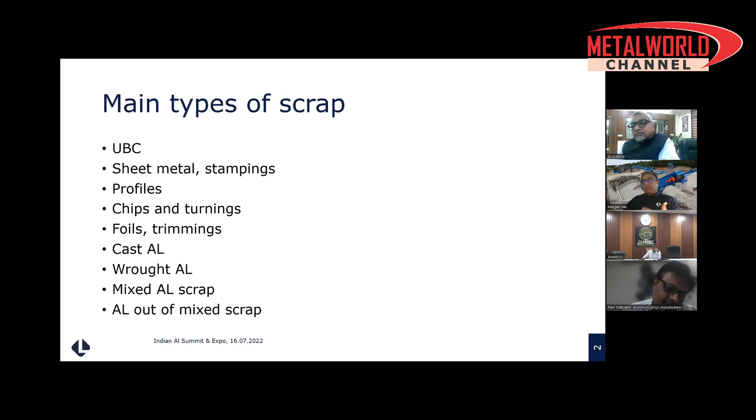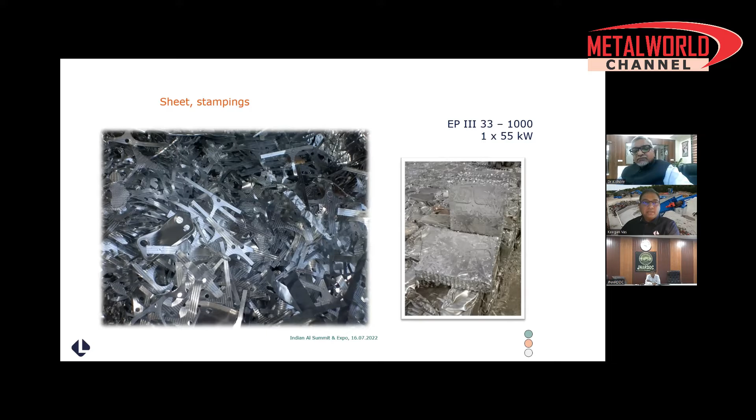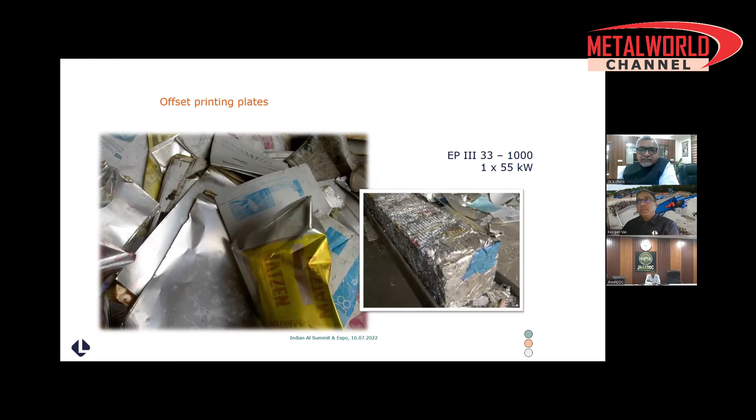In the coming slides, I will run through some pictures so you understand a bit more. These are coming from the process industry, where you have sheet stampings. On the right is the product after process, a bale that is formed. Sheets from offset printing plates have some contamination with paint and other material. There are two ways to process this material: you could either bale it as it is, or you can shred it if you intend to clean up the paint and other contaminants. Chips coming from various machining processes are briquetted into cubes, as you can see.

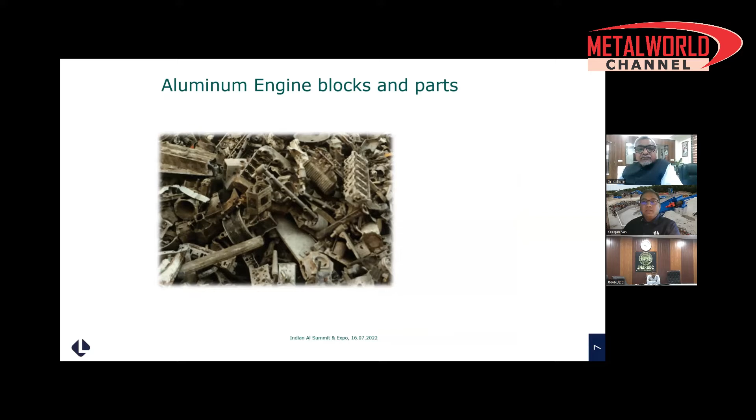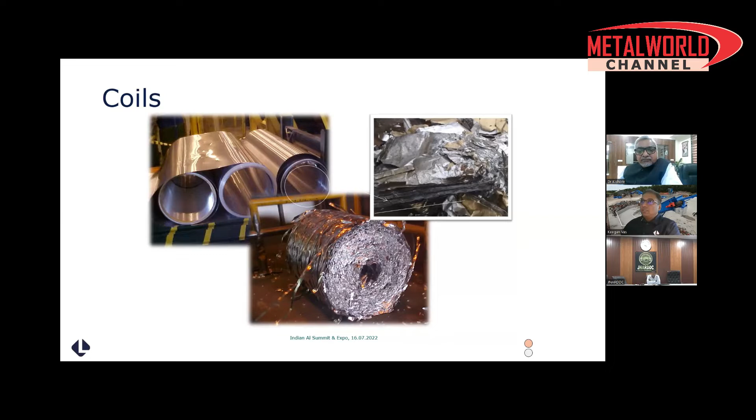Mixed loose scrap aluminium profiles coming from window panes and other applications in buildings and newer structures. Engine blocks and parts. I think this picture is from a car company, so you can see some engine blocks, gearbox. More and more cars are using aluminium in their manufacturing components. Scrap, again, another picture of different kinds of scrap. Coils from the process industries. This is virgin material and nice to be recycled.

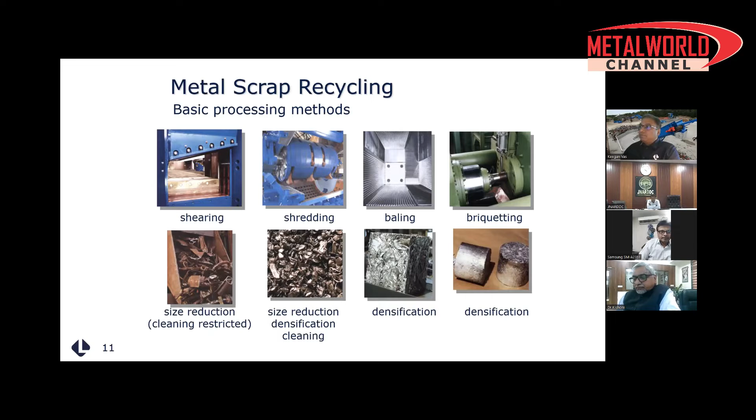So here is where Lindemann comes in on the technology and the available methods. You can see pictures of processed scrap. Shearing is the simplest process where you just cut material; it's as good as using a scissor on scrap. You can cut it to whatever size. Then comes shredding, which gives you size reduction, densification, and helps clean the scrap from contaminants. Baling is a simple process where you compact scrap. Aluminium is very light, so it gets very expensive to transport material from your yard to the smelter, and baling is the cheapest way to process such material. The last one is briquetting, mainly for fines.

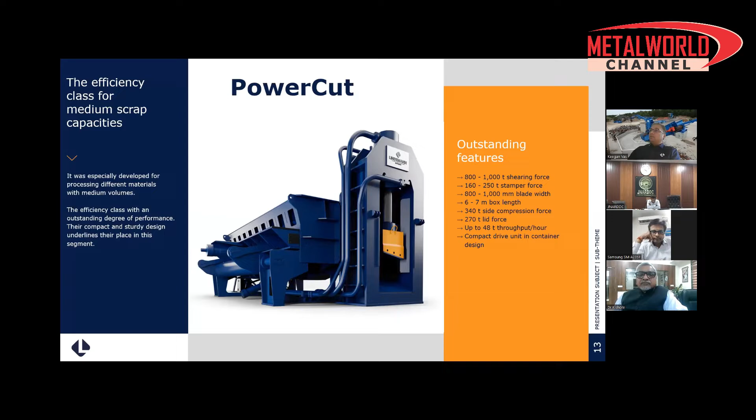Shredding is an interesting topic discussed all across the country recently, with increased awareness and motivation from the government. A lot of people are considering investing in shredding, so let me touch a bit more on this aspect of recycling. You have a rotor with hammers on shafts, say 6 shafts with maybe 10, 12, or 16 hammers rotating on that rotor, which weighs roughly 25 to 28 tons and rotates at 750 RPM. A ferrous shredder runs at a slightly lower RPM of 600. It strikes material against an anvil to crush it into small pieces, which drop through the grids on top and below. So basically you get size reduction.

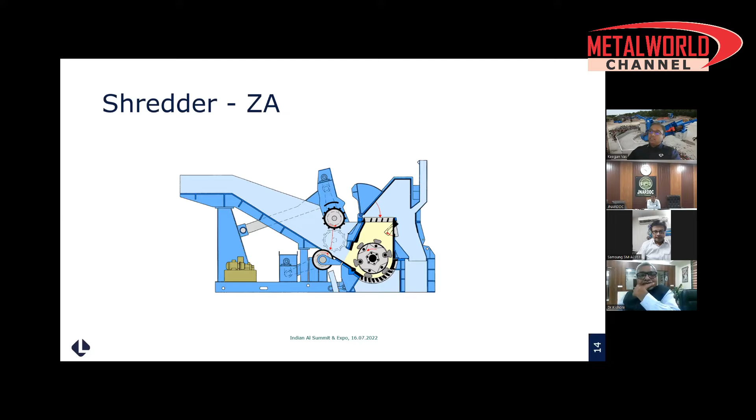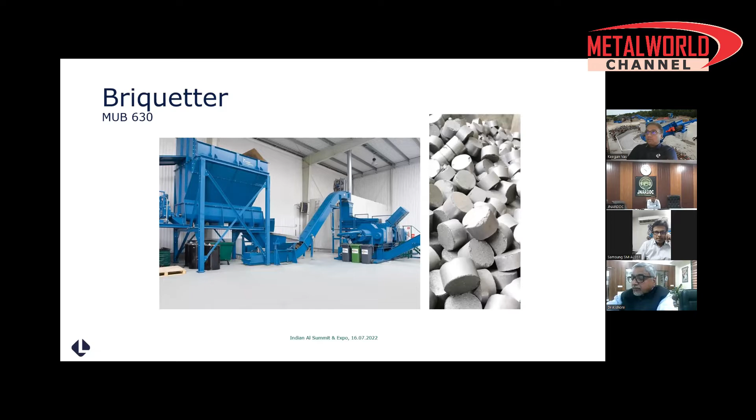Coming slide, we'll see more pictures. Yeah, so you can see the dosing bunker on your left, then the press itself on the right. Baling and briquetting both are quite close to each other, but what briquetting does is it ensures that the moisture content in the material is reduced to around 1% or sometimes even lesser. This is important because when the briquettes are going into the smelter, they need to be as dry as possible.

On the other hand, it is used to process chips, let's say chips coming out of CNC machines or lathes and so on. So they have contaminants of lubricant and oil and moisture in it. So briquetting is the best way. Other than that, dry material is also processed directly into a smelter where they have this vortex which is created, and you have liquid pumps which charge material into the oven directly.

However, by briquetting, the metal yield is also, we have seen that it's around 18% higher than what you would get by simply processing chips into a smelter. And again, burning oil is also not good. So most clients nowadays are preferring to briquette these chips instead of just smelting it right away.

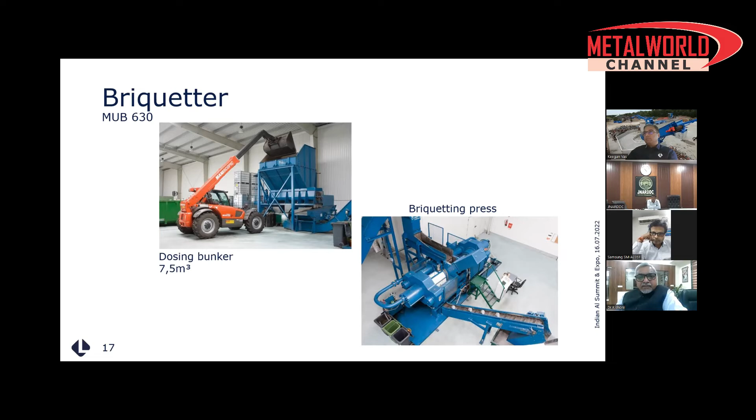On the other hand, the size of briquettes is much smaller. So when you have a lot of induction furnaces that use these materials, which we are seeing mainly in the secondary process, where you have small induction furnaces, they are not able to process bigger bales. Bales are of dimension of 300 mm by 300 mm. That makes it difficult. So with such kind of briquettes, the smallest size is about 70 mm, 90 mm, going up to 200 mm, dependent on the requirement. That's how the finished product looks like.

So let's look at the economics of these different processes that we spoke about. The figures are from data that we have collected across several of our machines. However, in recent times, with the price of oil going up and everything else getting more expensive, those may have changed a little bit. But overall, it's quite close. So shearing a ton of material would normally cost around 17 to 21 euros. Baling is 9 to 13 euros, briquetting 18 to 25 euros, and shredding is the most expensive process.

However, the higher the tonnage, you have better economies of scale, because the capex is quite intensive on a shredding plant, and it's also a very extensive process, maintenance intensive. So with shearing, you just have better handling. The size is 100 to 600 mm as you want. Bales: handling as well as better metal yield. With briquetting, you have handling, better metal yield as well as liquid removal. So essentially, you have dry, moisture-free briquettes.

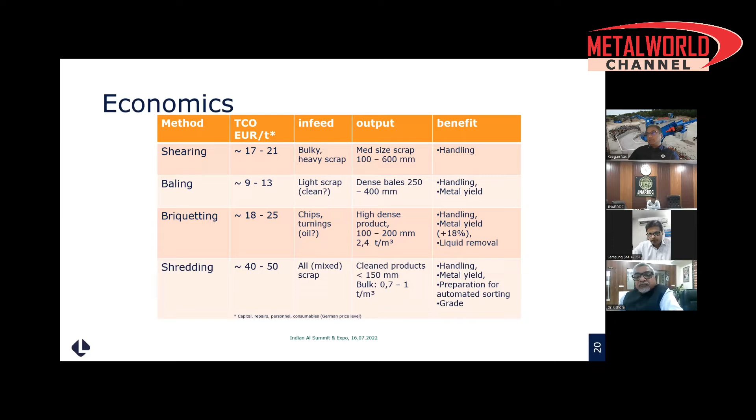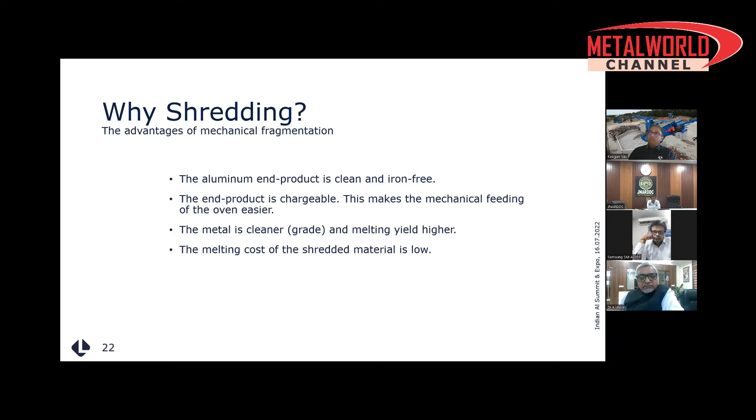So why shredding? The aluminium end product is ensured to be clean and iron-free. In a smelter, this is an important factor where you want the material to be as clean as possible without any contamination, be it iron, maybe copper, maybe anything else. The end product should be chargeable to make mechanical feeding into the oven easier. You get a better, cleaner grade of aluminium, and the melting cost of shredded material is much lower as compared to baled material.

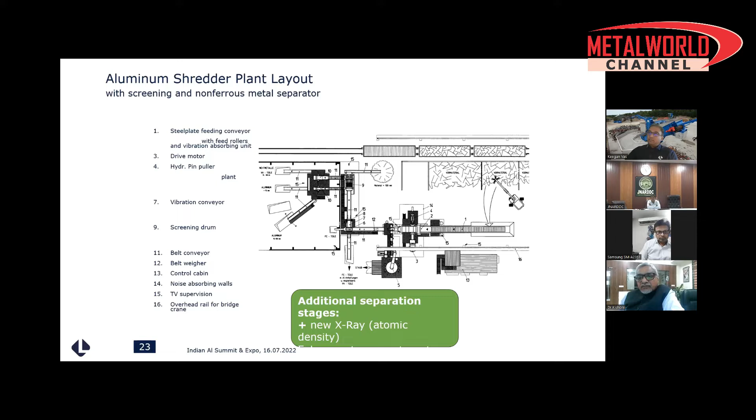That's a typical layout of an aluminium shredder plant. So you have the in-feed conveyor, the drive motor, the vibrating conveyors, screening drum, belt conveyor. You can also have magnetic separation by a drum magnet or overband magnet. On the side, you can see there are some noise absorbing walls and an overhead crane for maintenance. Another view of the shredder plant.

So what this includes is treating of the shredder heavy fraction and the light fraction. So when you have a mix of material that is coming, that needs to be processed. For example, when a car is recycled, you have ferrous, you have aluminium, you have seats, glass, rubber, tires, copper from the motors and everything else. Or if you are recycling, say, a washing machine or white goods, refrigerator, and so on, you have copper along with aluminium and everything else.

So the shredder downstream then has different technologies to recover aluminium, and most of you might be familiar with Zorba, which is a name for a metal mixture of aluminium, copper, zinc, and brass. A 3D view of a basic shredder. And this is also an installation, I think a recent one we have done in Europe.

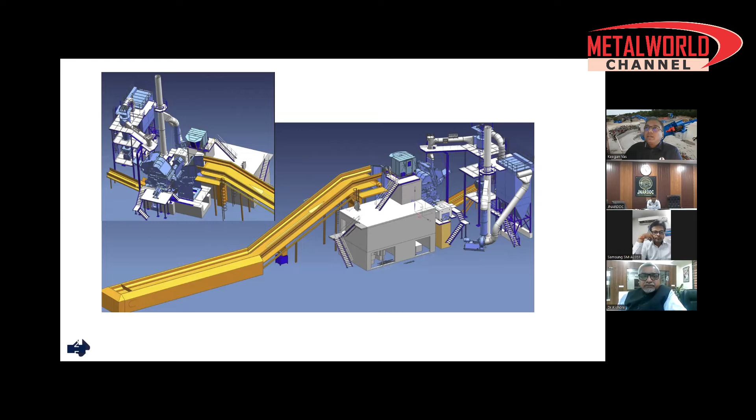As you can see, there's an in-feed conveyor, the shredder, and then the dedusting system. So we suck out air from the shredder box, which pulls away dust and any kind of light material such as plastics, rubber, and things like that. And this is then processed downstream.

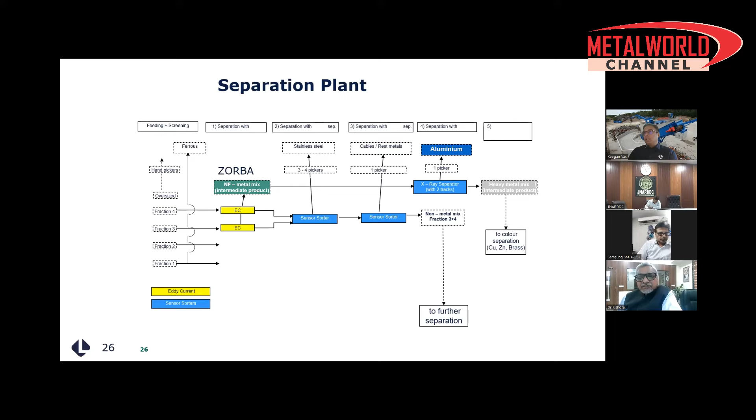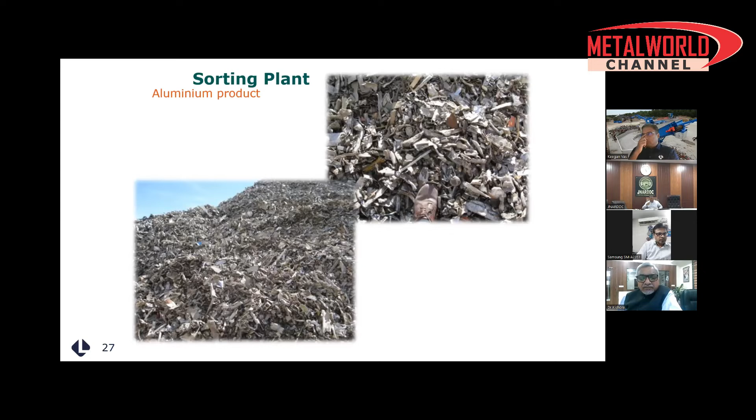The sorted product, as you can see there on the left, is the aluminium product. And the heavy metal product. Everything else that was not aluminium is sorted in a separate section.

We also use X-ray technology. So this is mainly used for sizing. For example, in the first step, you size the material coming out of a shredder into two fractions, one between 10 and 30 mm, and the second one between 30 and 100 mm. You have an X-ray tube that activates the valves that are under the belt. So there is a jet of air which is blown across material to sort it into the two bins, as you can see.

Once the material is sorted or you have done the sizing, then in the next step you have X-ray imaging process. So this works on atomic density parameters. So the details are fed into the system, and that compares the atomic density to the actual material that's on the conveyor belt, sorting it into each channel.

On here, I try and mouse. Can you see me moving there?

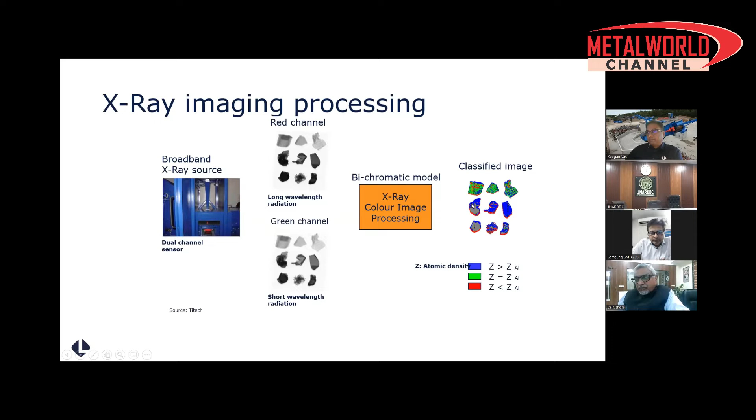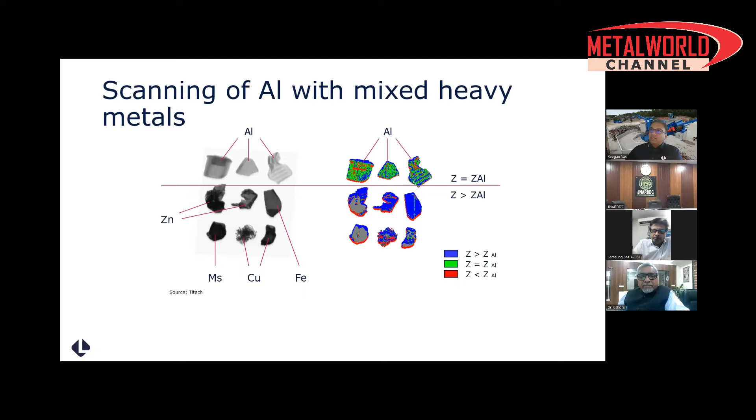Okay. So around here, the red mark is a small nail. So when you have these profiles coming from buildings and so on, they have some screws in it. So this can actually be a big problem for the smelter. And thus, X-ray imaging helps to ensure clean material coming into the smelter. So this is a better picture here. You can see the nail. As well as you can use it to scan and separate other materials such as copper, zinc, and brass. Fractions that you can see.

So the environmental considerations, why go into all this headache? Aluminium is one material that can be recycled infinitely. And so the data here shows that you have roughly 95% savings in energy cost when 10 tons of aluminium is processed with recycling as against producing it from ore. At the same time, when you recycle steel, also it is 55% lesser in energy consumption as against producing 550 metric tons of steel from normal ore. It reduces carbon emissions.

Scrap processing improves the melting process, so lower melt time, less losses, lower specific energy consumption. Pollution control with dedusting systems, and so on.

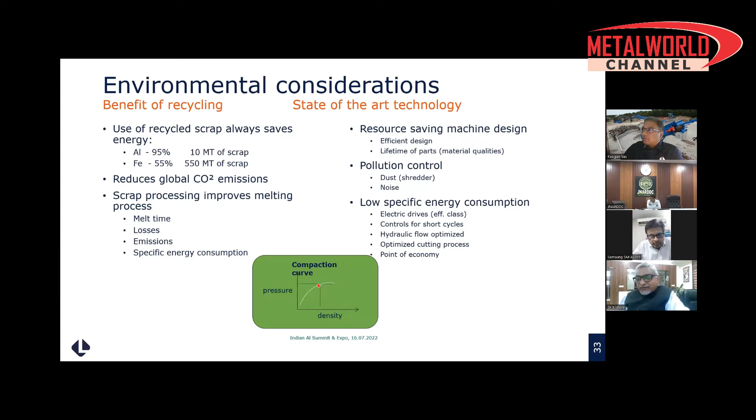Mr. Keegan, please a little bit fast because we have... Yeah. So I think I'm at the end of it.

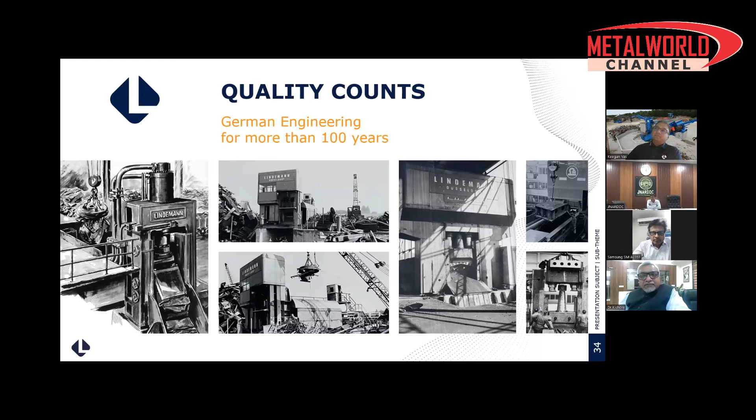Okay, thank you. So that was all about the technology, and this is a slide about us as to where we started. So we are in Düsseldorf. We are the inventors of these machines. The first machine we made was in 1930. Currently we have 2,000 active machines running worldwide with 185 million tons of steel that is recycled on our machines. So that's the equivalent of 25,000 Eiffel Towers. 380,000 bales are produced every day on our machines. That's our experience. And this is our network. You can see I'm there in UAE.

This is the Institute Jawaharlal Nehru Aluminium Research Development and Design Center, set up in 1989 by Ministry of Mines in technical collaboration with United Nations Development Program.

Till 1996, this institute was focusing on upstream research that was related to extraction of aluminium, say the Bayer's process or the refinery activity, or aluminium through electrolysis process. 2000 onwards, there was a national task force, and the downstream division came up, and we also started working on the metal side. And then in 2020, you can see on your screen, it's a landmark year for us.

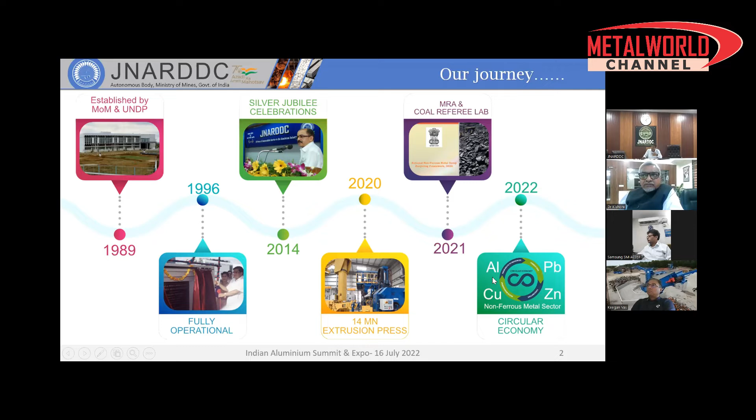And we have set up a research extrusion press, but it's actually a commercial press, 1400 ton or 14 meganewton extrusion press. And in 2021, Ministry of Mines nominated us as a metal recycling authority, and we also established ourselves as a coal referee lab. Then in 2022, some assignment from Ministry of Mines, that is the idea of NITI Aayog, circular economy in the metal sector, where we are dealing with the various draft guidelines for aluminum, copper, lead, and zinc industry.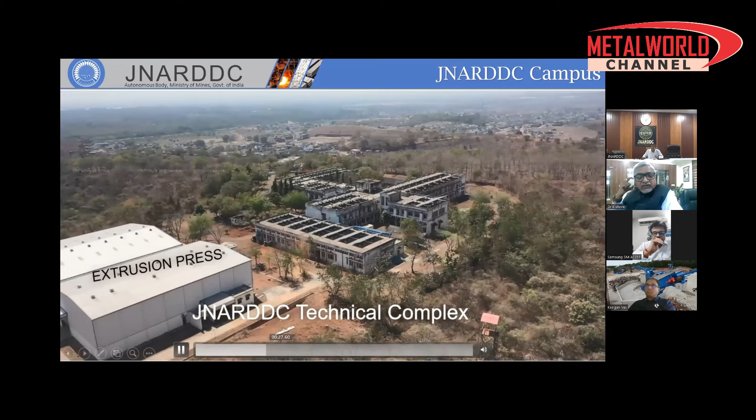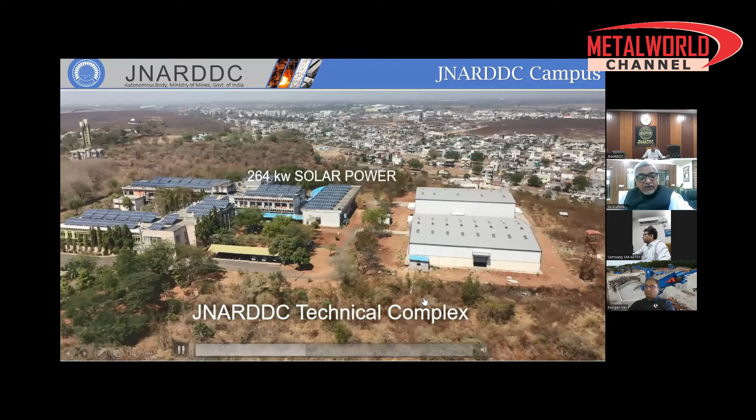I hope the video is smooth. I'm not sure if... then

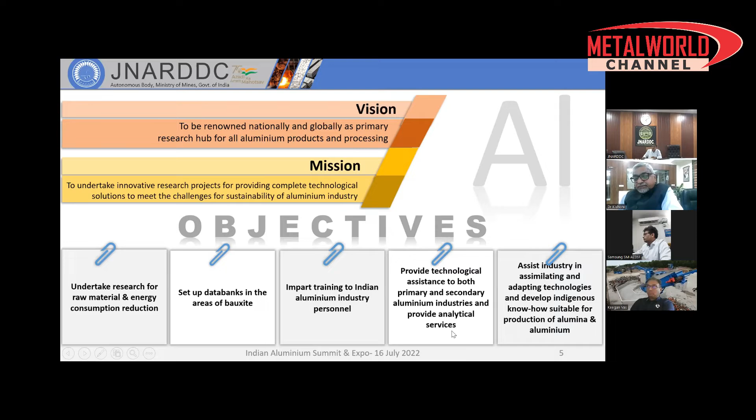Objective and missions and visions I will skip, but here the fourth objective, where you can see: provide assistance to both primary and secondary aluminum industry and provide analytical services. So we are currently focusing on the recycling sector more compared to the primary side. And in the downstream side, we are working on metal forming, casting, alloy development, characterization, and our chemical and mechanical testing facilities are 17025 accredited. And soon we are going for this 17034:2016 accreditation.

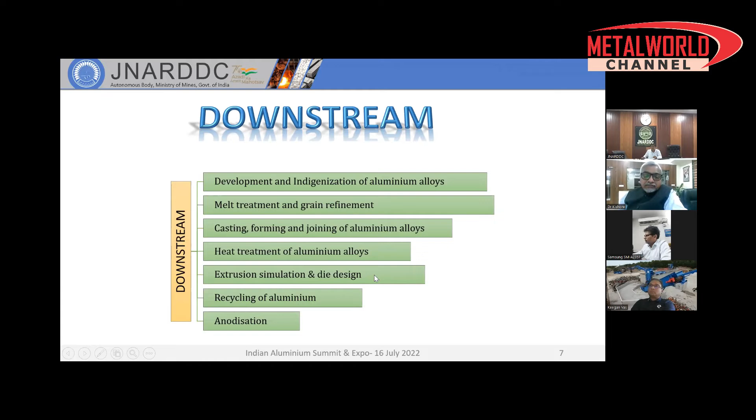That is the accreditation for reference material producer, because we are going to produce reference material for spectrochemical analysis of aluminum alloys. In the downstream division, we do development and indigenization of aluminum alloys, melt treatment and grain refinement, casting, forming and joining, heat treatment, extrusion, simulation, die design, recycling and anodization. We have full setup for extrusion, except the casting part, like die design, simulation software DEFORM, extrusion press for validation, metallographic laboratory, mechanical characterization, electrical conductivity meter, scanning electron microscope, optical emission spectrometer.

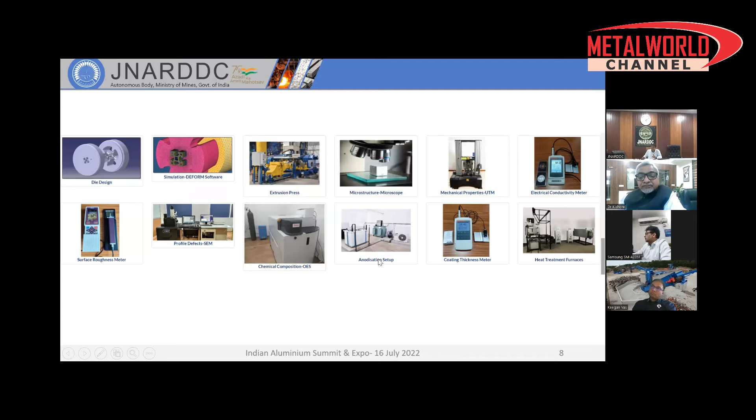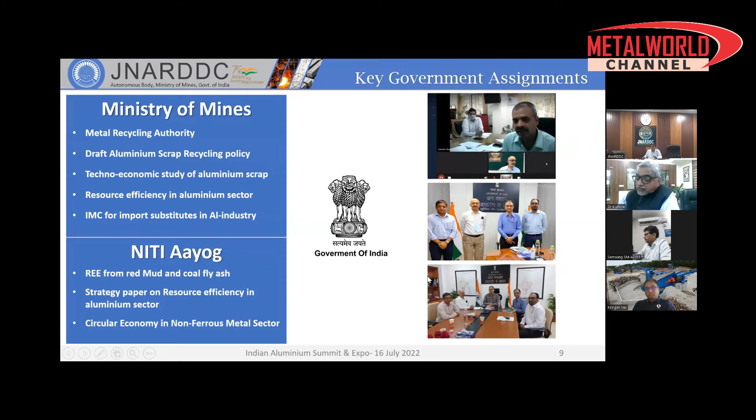This OES is a very unique one. This is a PMT based equipment, and the forum will be surprised that one can find 40 element calibration for aluminum alloy, perhaps rare, and you will not find it anywhere in the world. We also have a 50 liter anodization tank and heat treatment or melting facility. Some of the assignments from Ministry of Mines: we have been nominated Metal Recycling Authority, we drafted various documents which the Ministry or NITI Aayog subsequently published as a strategy paper on resource efficiency or national non-ferrous recycling framework. And Ministry of Mines is very regularly following this circular economy agenda or the metal scrap recycling framework.

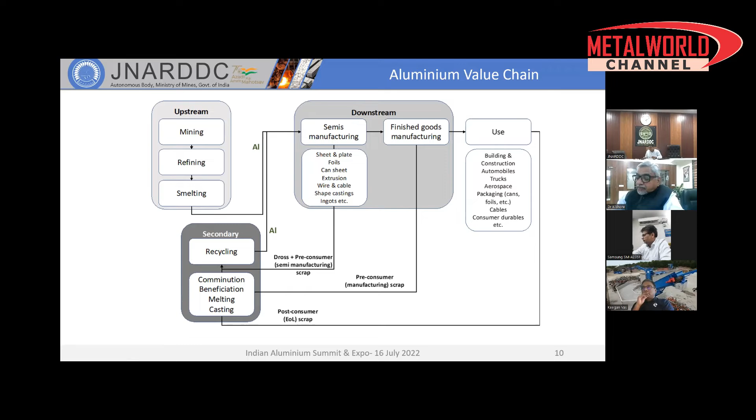And coming now to the actual R&D part that I'm going to talk about, let's have a look at the value chain for aluminium. Here, the metal for product manufacturing is coming from the primary or upstream side and the secondary side, and at the end of it, end of life scrap, after you use it in various applications, building, auto, all these are coming for recycling. Even the pre-consumer scrap, or the process scrap, some people call it prompt scrap, comes from the downstream for recycling. So why do we recycle?

Recycling looks very simple. Even kids in pre-primary, KG1 or so, are taught some kind of recycling concepts in schools today. So people think that recycling is just collection of end of life or process scrap, do some kind of dismantling, detach it, say if it is a wheel or some part of a car, take out the rubber or so.

Then you have to remove, of course, foreign material before remelting it, putting it into the furnace. And once you are ready with the molten metal, you put it into, say, casting or subsequent forming applications for product manufacturing. But each and every step is very, very critical.

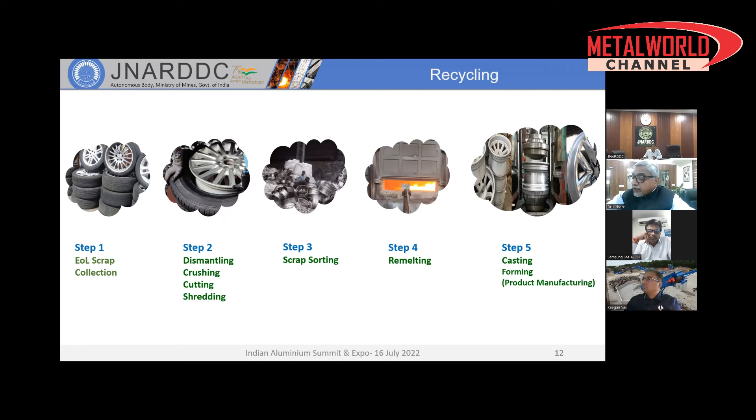Say the scrap collection: import is one of the sources for the country for the time being, and then manufacturing discards, domestic scrap auctions is one, then municipal wastes, even our medicine bottles, the cough syrup bottles which have ROPP caps, go as municipal waste.

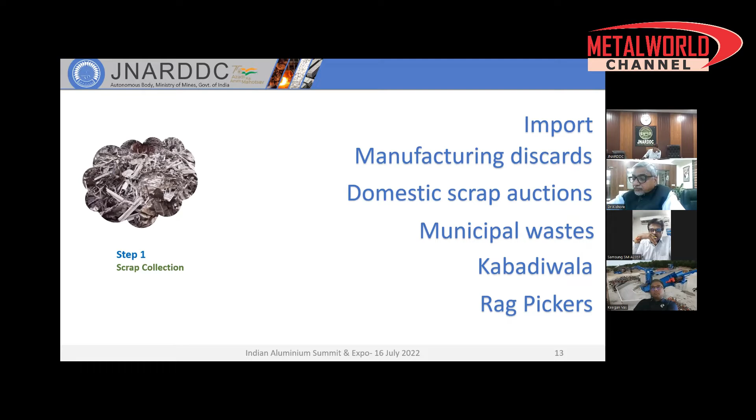And even some people, some rag pickers जो साइकिल पे आते हैं घर पे आपके, वो आपकी utensils यह लेके जाते हैं. So ultimately this is the requirement of the country, that scrap collection system.

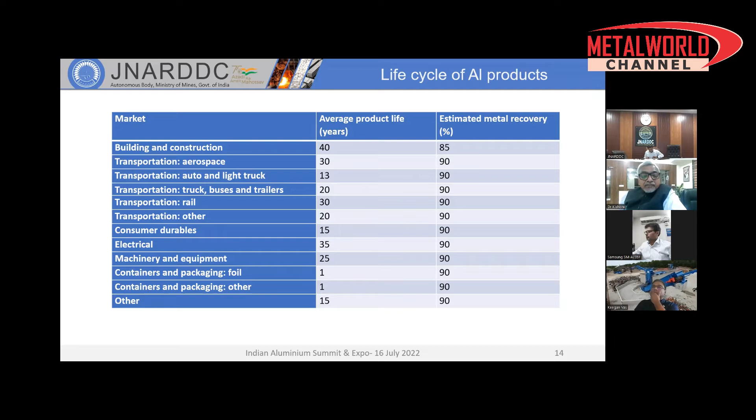Every forum you'll hear the same thing, and based on the life cycle, in building and construction, average life is 40 to 50 years. Transport sector, if you see, nothing is less than 10 to 15 or so, except the packaging sector. So the life cycle of the product span is very high. So this aluminium which we used earlier will obviously come back, and there has to be some kind of a collection system to be devised for the country.

Then dismantling, like my previous speaker, Mr. Keegan, has given a very good presentation about the shredding and the briquetting and baling. So these are the areas where we have to be very, very choosy about the technology.

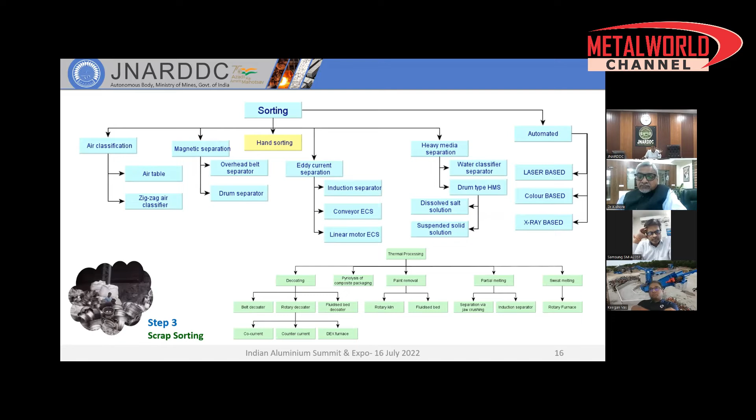Say sorting, there are a number of methods. We are currently resorting to hand sorting only. It can be air classification, magnetic separation, heavy media separation, automated like laser based, color based, X-ray based, shape based, artificial intelligence based, what not. So all these areas are open for R&D.

Then the melting side, say degassing, filtration, alloy addition, grain refinement, everywhere. In one of the meetings, some people approached me asking whether JNARDDC can give a customized degassing setup for their furnaces, because degassing setups are manufactured by big OEMs, and they are not customized. They're giving them on some volume basis.

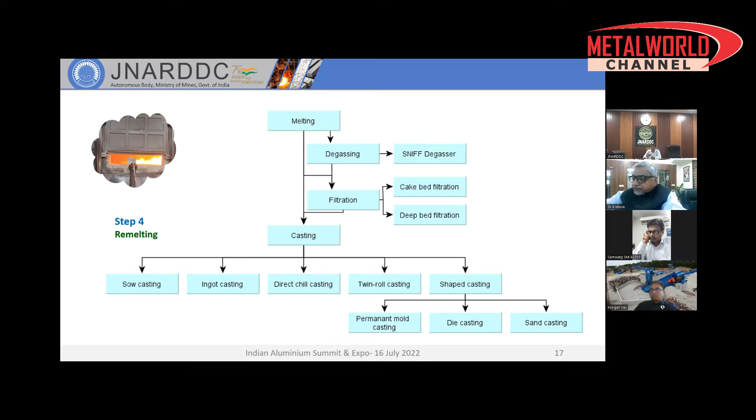So somebody asked me whether some kind of a trolley which has a degassing system could be operated in this plant today, and tomorrow or the second shift be taken to the other plant. So that kind of setup has to be devised for Indian conditions, where the size of the units is really small compared to the developed countries, where the melting capacity is multiple tons and the furnaces or equipment are really larger. But here, if you go to crucible furnaces, small handi furnaces, how do we degas it? So that kind of customization in the Indian context is required.

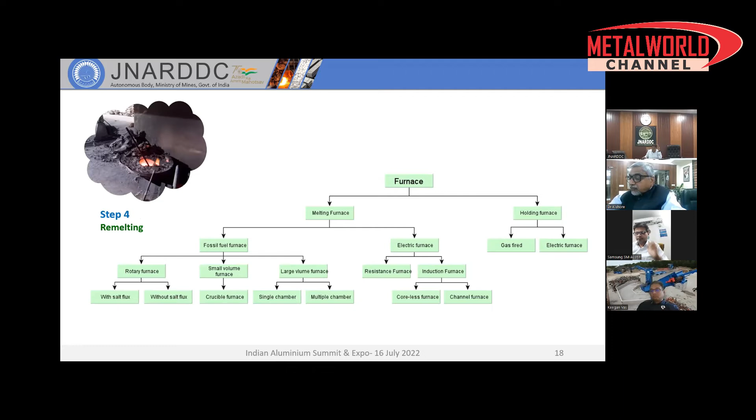Then remelting, we have, as I said, various furnaces, say a rotary furnace or the electric furnace, or the fuel fired furnace, or even the muffle furnaces. We have seen even wood fired furnaces used somewhere. Then forming, there is an issue with the forming operations.

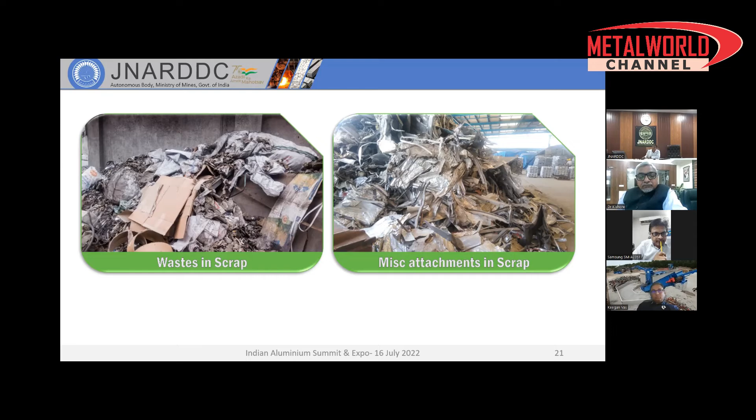Maybe it is iron contamination, which may require shredding or various kinds of sorting technique, because iron is one of the critical elements, and it needs to be tackled properly. Otherwise, not only deterioration of the property, because it can give iron related intermetallics in the material, but also the material is more likely to be off grade, and it may not fit into the grades of various standards, be it Bureau of Indian Standards का कोई इस grade हो या कि फिर industry standard, whether the automobile industry is asking for some grade. If the iron level is high, obviously nobody will prefer to take such material, or even see how the local industry is doing.

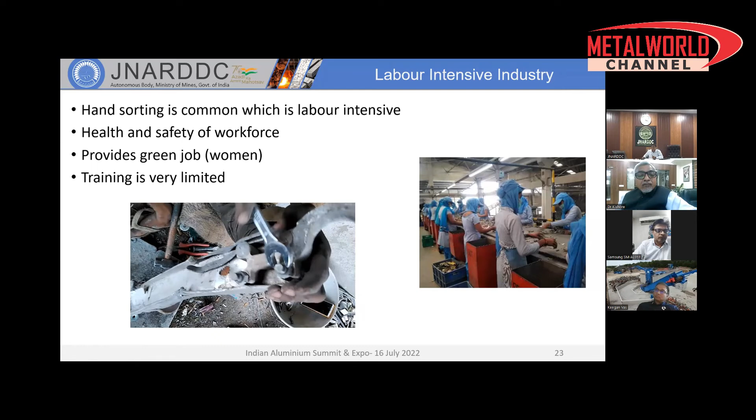They are taking one piece manually and detaching the nuts and bolts with some part of this. So the dismantling or shredding devices have to be literally adapted to Indian conditions, so that a small recycler who is not capable of going for such huge capex can manage. As Mr. Keegan says, capex is one of the concerns, and that is the need of the industry.

This is the unique picture of the Indian recycling industry, where ladies are picking up various materials or grades of metal from the conveyor, and this is how it is sorted.

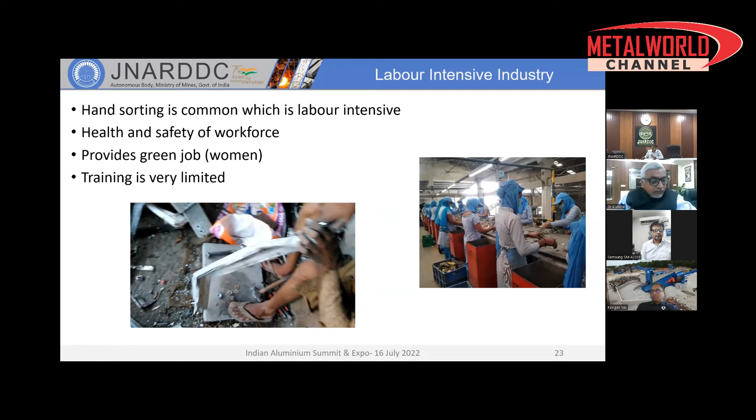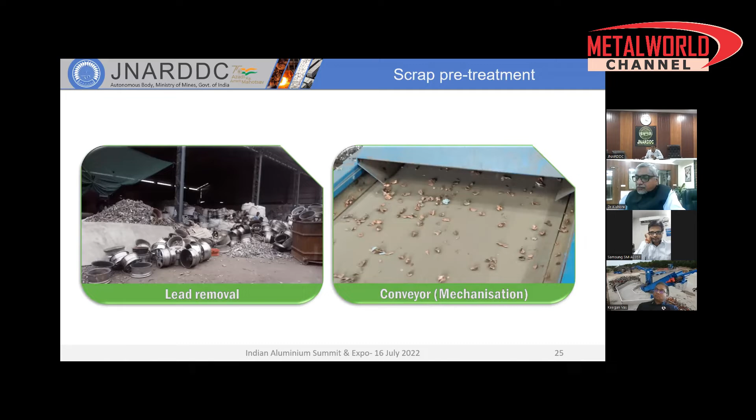Some more pictures show mechanization where you can control the speed of the conveyor, using forces to separate material by gravity, and lead removal. All these things are really good. We also observed some compactors, and how the material is washed, everything.

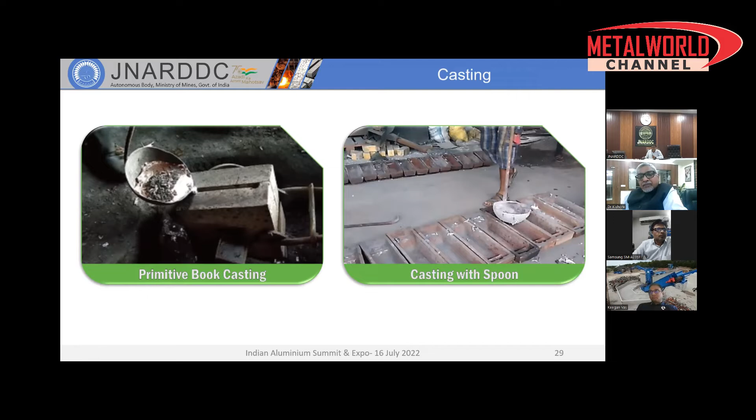Why am I projecting all these pictures to you? Because people are doing this kind of casting, taking the chammach, or spoon, from the furnace, directly making book casting and then rolling. Do you think this material will be good enough for rolling down to a 2mm or 1.5mm sheet for some utensil or packaging application?

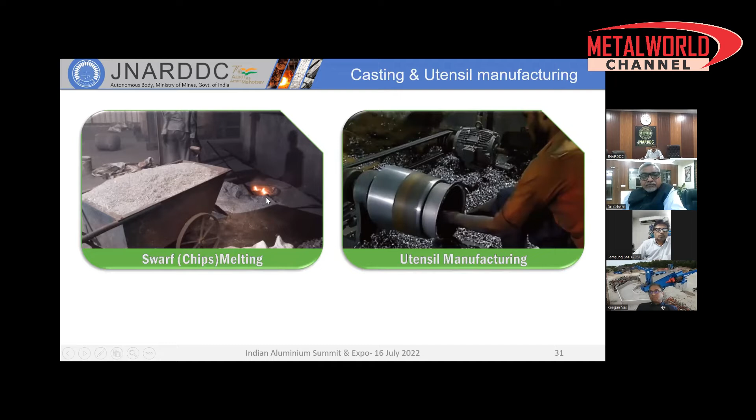Then, how the chips are melted—you can see in the utensil industry how they are doing this. I mentioned that wood-fired furnaces are also used.

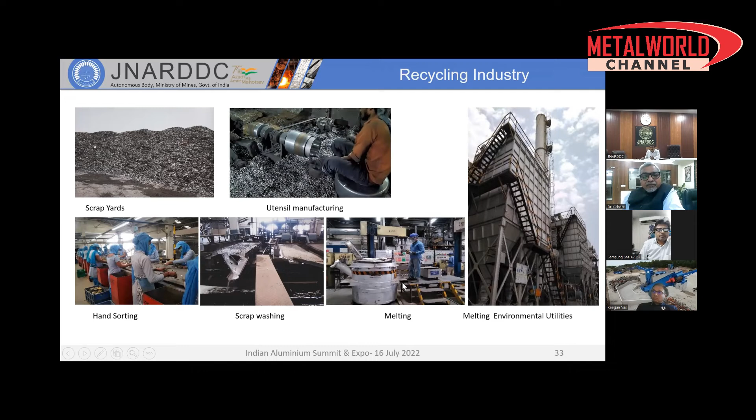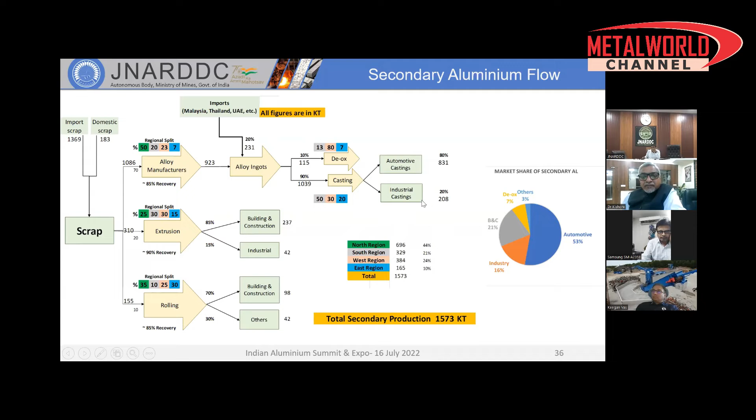The total secondary production is about 1.5 million tons. Here are the various users, such as building, construction, industrial, and product-wise extrusion, rolling, or casting. Of course, the casting mostly goes to the automotive sector or some to industrial sectors.

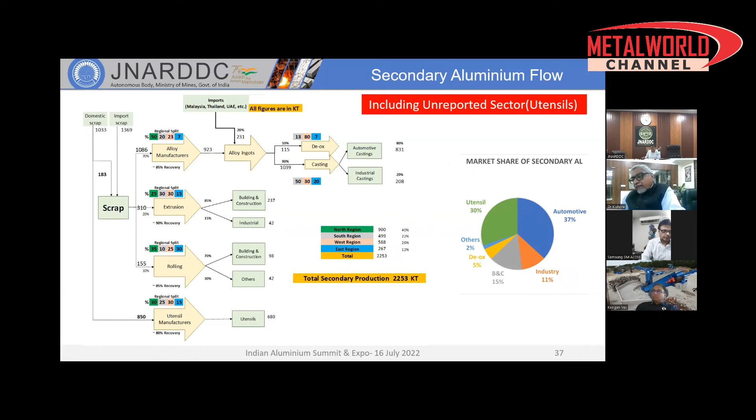The numbers change when people say that the utensil sectors are not included in previous numbers. This is one of the conflicts I will talk about a little later. This is the overall consumption pattern—mostly it is going into transportation, 60 to 70%.

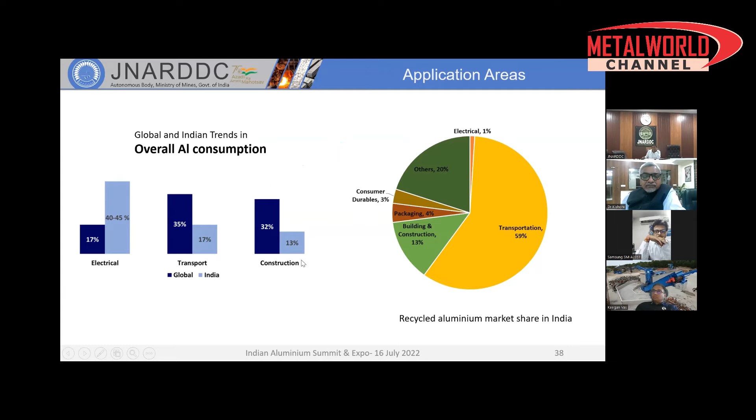The pictures we saw, or the discussions we are having here, do not really support these numbers. Because if India is number 1 in recycling, then it has to be number 1 in all aspects—be it the quality of the material, the practices of the recycling industry, environmental concerns, or every related aspect. We need to be number 1.

That is what the Government of India thinks. That is what the Metal Recycling Authority or JNARDDC thinks.

Some of the issues or challenges, like in every forum, include the concern of how to collect back, or the reverse logistics for scrap or end-of-life material. That is one area for research—not only the core metallurgical research I will talk about, where we have to deal with iron contamination or off-grading of material because of unwanted, undesired elements going into the metal. This area also requires a lot of research.

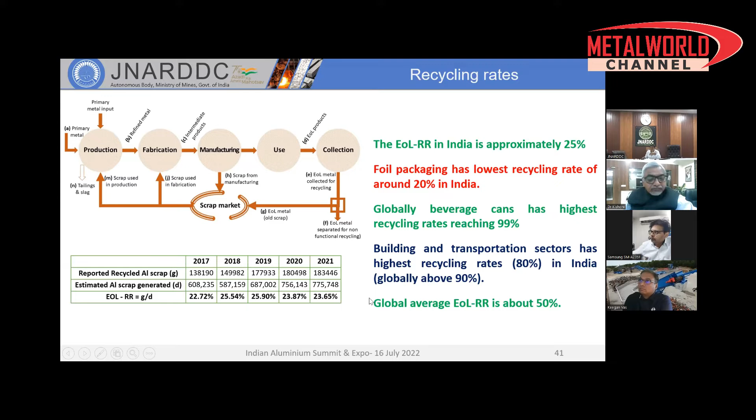In the country, the end-of-life recycling rate is around 23 to 25%, meaning the reported value is 180,000 tons of material coming back for recycling. But we did some calculations, taking numbers from various sources, and found that much more scrap should be available. So where is this scrap going? Number one issue is the information related to the recycling industry—the data, the numbers—and the technology gaps.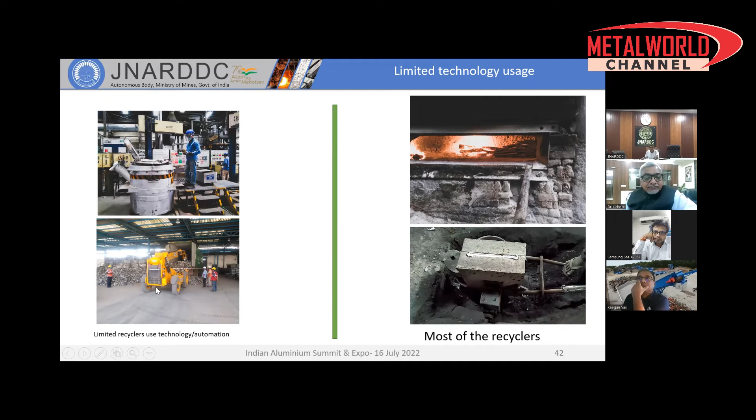While we have some reputed, very good recycling industries setting an example, where they are supplying molten metal to nearby die casters as well as doing in-house casting. And regarding the technology gap, we have been working on various aspects of...

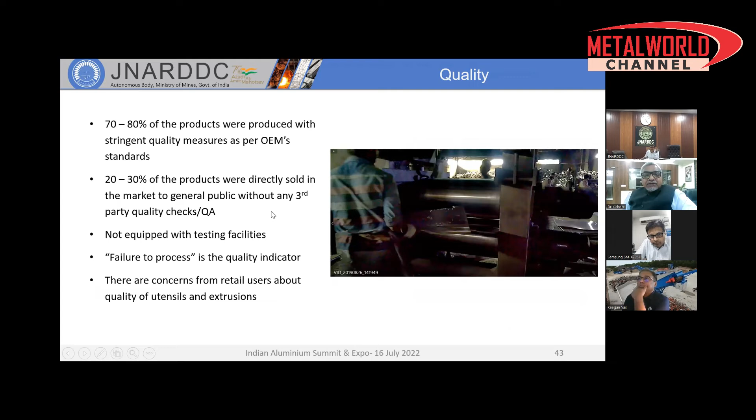Chouhan sir, a little faster please. We have sir, short of time, please. Yeah sir, give me some time.

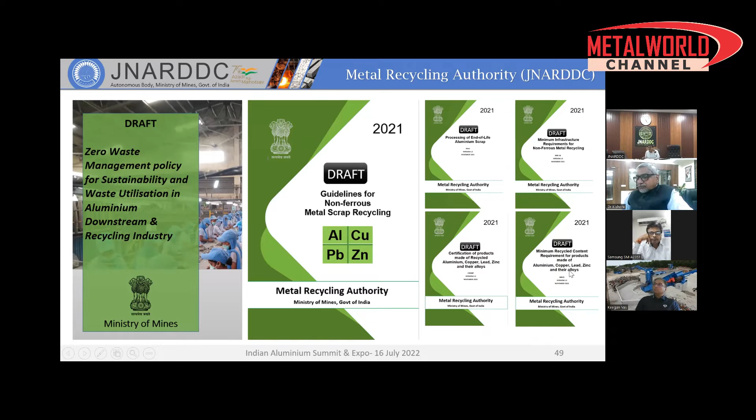We are drafting various guidance documents which will be subsequently published by Ministry of Mines or MRA, like minimum infrastructure requirement, minimum recycled content requirement. This is one of the areas, like minimum recycled content requirement, when government is helping the recycling industry to say that any particular product of aluminium will have certain minimum recycled content. So as a research institute, we foresee this area to have a lot of R&D requirement, the area where aluminium or recycled content has not penetrated, we have to explore that.

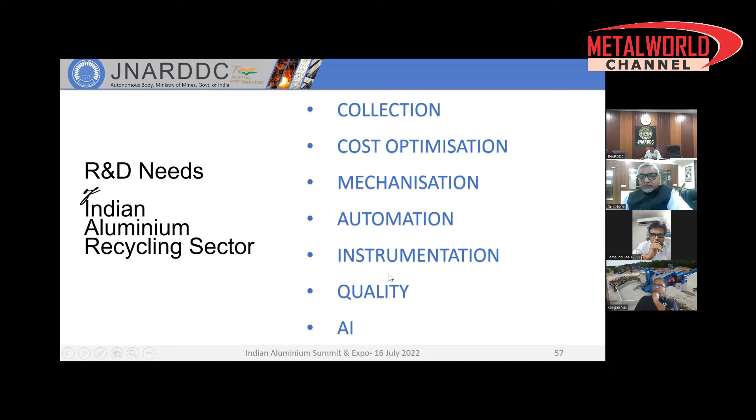I'll skip these slides because the previous speaker has already touched upon this area. For the recycling industry, various concerns are the cost, of course. So we foresee the R&D needs of the aluminium industry as addressing the collection or reverse logistics of scrap metal, then cost optimization, because although they are small recyclers, they are also losing lots of metal by improper practices. Then industry is looking for mechanization, and large size recyclers are looking for automation and instrumentation, but the country is looking for quality in the recycled material, and maybe artificial intelligence can also help here.

This specific slide, I'll try to attract the attention of the forum here. This is the analogy I have tried to create with cycling and recycling. If you go up the hill or cycle up, or go down the hill or cycle down, which is more rewarding—perhaps everybody can have the simple answer. Same is the case with recycling: if you try to upcycle, you will have better rewards, better prices for the material. But if you downcycle or downgrade the material, you'll have to sell the same material for less.

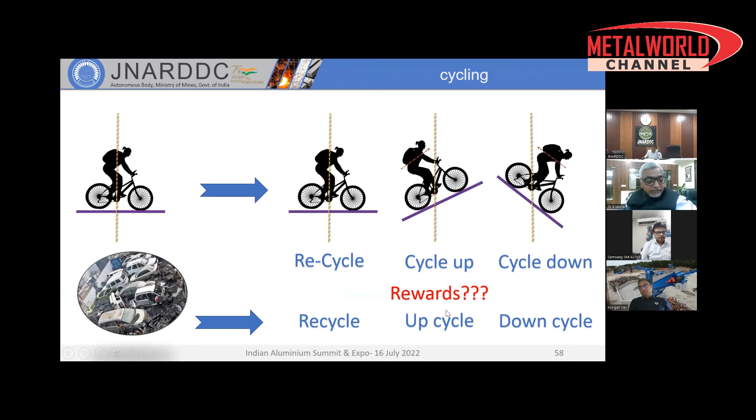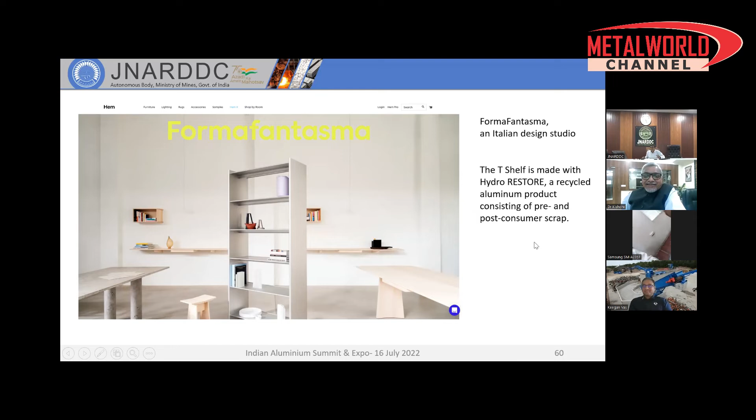So this is the upcycling area, like Hydro is doing. An earlier speaker in the previous session was talking about branding, like Hydro's CIRCAL or RESTORE branding, trying to bring that to recycled material. That kind of branding MRAI is also envisaging for the Indian context, for the Indian recycling industry. This picture shows how to promote recycling or the secondary sector. Formafantasma, an Italian design studio, has used recycled product to make this bookshelf. Maybe MRAI should also promote recycled content and get help from some popular design studio or designer in the country.

JNARDDC is doing some projects for the recycling industry. Just two slides, two minutes—make it fast please. JNARDDC has recently taken up a research project for undiluted recycling of cast aluminium alloys containing high Fe impurity suitable for SMEs. Here, iron is one of the culprits or contaminants we want to deal with—we want to filter it out, or settle it with some element so it doesn't hamper the property. This project is in association with Munjal University, Gurgaon, and Sri Ram Krishna from Coimbatore, and is sponsored by Ministry of Mines.

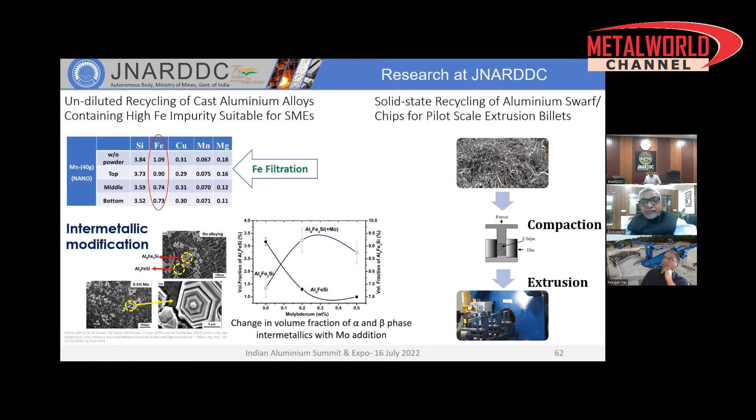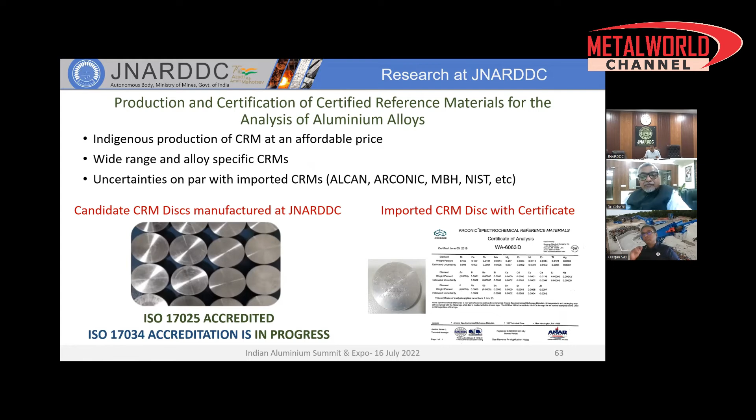Then we have taken up one more project for solid state recycling of extrusion chips, where Tata Advanced Systems, who are aerospace structure manufacturers and generate lots of chips, are working with us on this project. And last slide—JNARDDC is also trying to help the recycling industry by producing reference material, certified reference material in the country for their cost optimization. So that's all for the time being. Please get in touch with JNARDDC MRAI—we'll certainly be happy to interact more with the recycling or technology supplier side as well. Thank you so much, and thank you Chandekar ji and the Metalworld team for inviting JNARDDC to this forum.

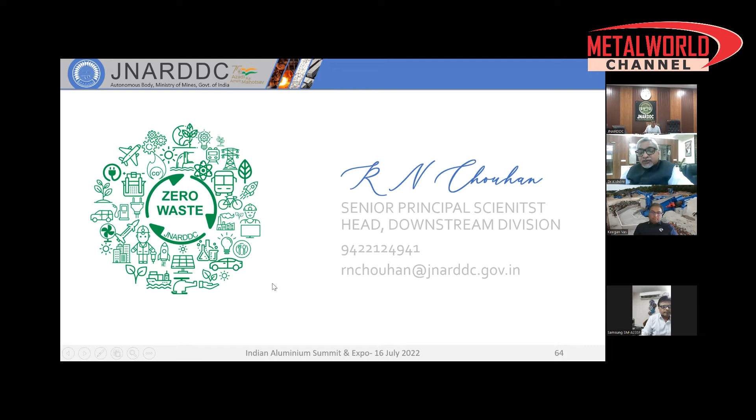Thank you very much, Chouhan ji. Very informative and interesting—really, this time there's two papers, one related to R&D and another for solutions. So both are made for each other—you are doing the R&D and the solutions are ready with Mr. Keegan. I think there's coordination between both presentations, correlated with everything. I think we have another 5 minutes, Mr. Chandekar, so we can have some questions with Keegan and Mr. Chouhan.

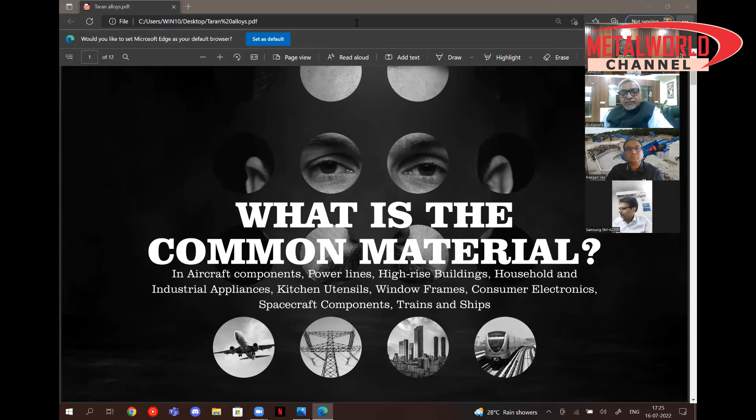As we all know, aluminium is the most common material, used in aircraft, high-rise buildings, household items, and consumer electronics. Next slide, please.

As we all know, it's the most abundant mineral on Earth after oxygen and silicon, and globally it's only behind iron as the most used alloy in the world. Next slide, sir.

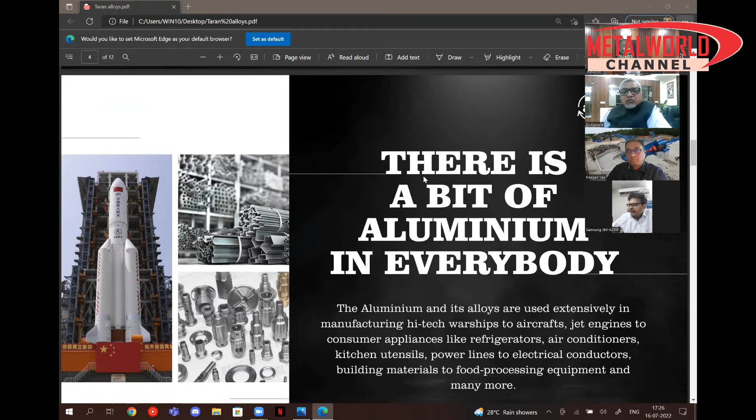So there is a bit of aluminium in everybody, sir. Aluminium and its alloy are used extensively in manufacturing high-tech warships, aircraft, jet engines, consumer appliances like refrigerators, air conditioners, kitchen utensils, power lines, and many more items. Next slide, sir.

When ingots are combined with other materials, aluminum really shines. An alloy is a metal combined with additional elements to create a new material with superior quality, stronger or with a higher melting point. The other commonly used metals mixed with aluminum are boron, copper, lithium, manganese, magnesium, silicon, zinc, and a few others frequently utilized for making alloy products. The alloy enables aluminum's natural properties to be improved, allowing it to be cast, forged, extruded, or used for welding. Next slide, please.

Why aluminum, sir? Aluminum is as adaptable and recyclable as we want it to be, used for anything from yogurt lids and cans to automobile engine parts to aeroplanes. It is easy to recycle, has a high strength to weight ratio, high electrical and thermal conductivity, high reflectivity and resistance to corrosion, is non-toxic, ideal for packaging and kitchenware production, and has ductility, easy to cold work and fabricate. Next slide.

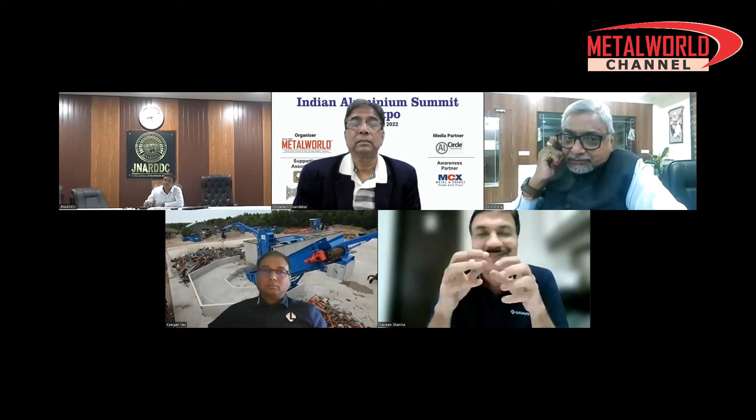And Chouhan sahab was showing some data on scrap availability in the country. So I would like to share here that as of now, the scrap available, which is mainly from post-consumer, is not more than 70,000 tons, as against what is being imported or the demand of 1.8 million tons. So, Chouhan sahab, there is nothing like that. There is no hiding of data.

Frankly speaking, as you yourself told, the consumption in our country is in those applications where it will come for recycling in 25 years, 30 years. And the main area, which is mainly food processing or transportation, foils or cans, that is not happening in our country. That consumption will not happen in time to come.

So, as in my previous remarks in one of the conferences we had a few days back at Nagpur, Chandekar sahab, I would like to put up some points here on behalf of MRAI and the entire recycling industry. What I will suggest is that a white paper should go from your side to the ministries related to this sector, like Ministry of Mines, Niti Aayog, Ministry of Commerce, DGFT, Finance Ministry, and MOEFCC. That these were the participants, and this was the pain area.